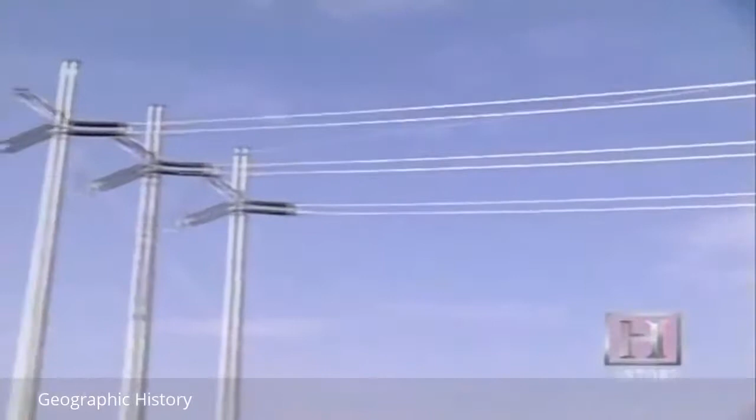Over the next century and a half, we took a world which had dominated us and transformed it into this, an electrified environment which responds to our every need. We control our climate, process information, and tend to our health with power that flows hundreds of miles across an interconnected transmission grid that encompasses the entire country.

Electric current, the flow of charged electrons, intimately influences how we live, yet most of us understand little about how it works.

In 600 BC, the Greeks first discovered that static electricity could be generated by rubbing amber. It wasn't until the 18th century, however, that Benjamin Franklin theorized that electrical fluid might be composed of particles. By harnessing this flow of electrons, or current, inventors and industrialists more than a century later laid the foundation for what would become the colossus of electrical generation, the modern power plant.

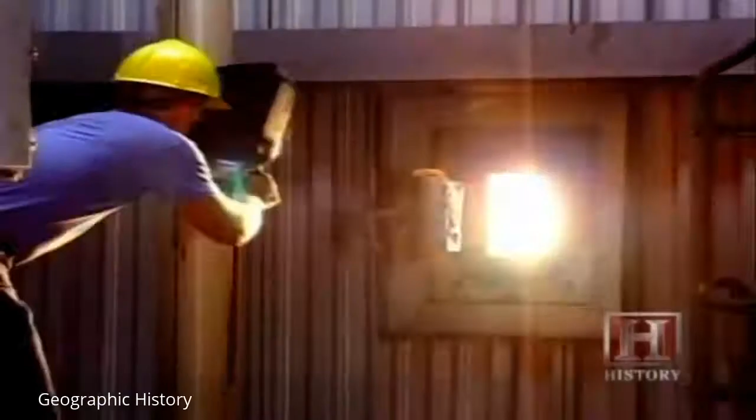It can be anything from a red-hot behemoth that once started consumes trainloads of coal without interruption for years, or it might be a nuclear plant, incongruously perched at the edge of the shimmering Pacific Ocean, a plant that on its own produces 20% of Southern California's energy.

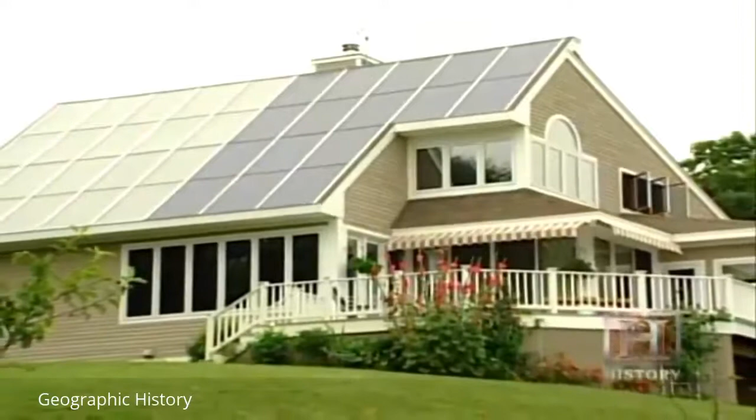Or maybe it is simply this, a house that generates more energy than it consumes and returns that surplus to the electrical grid for public use, a new model for the future of power plants.

But whatever guise contemporary power plants take, the basics of their design and their integration into commercial and domestic life were forged more than 100 years ago in a conflict between two giants of industry and invention, Thomas Edison and George Westinghouse. The outcome of the fierce competition between these two men would ultimately dictate how electricity would be generated and transmitted. But their first battle would be waged over how to bring safer light to the cities of America.

Early natural gas lighting systems in homes, for example, on occasion were quite dangerous. They had no shut-off valves, so if the lamp went out, the gas would continue to accumulate in the home, and they had some major explosions in homes.

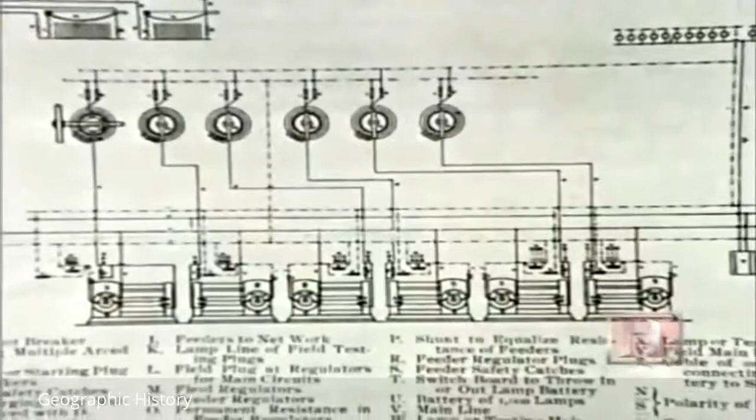In 1879, Thomas Edison invented the first commercially practical incandescent lamp with a high-resistance filament that glowed when heated by a low current. He soon followed this with designs for a complete distribution system for light and power.

On September 4, 1882, after delays and cost overruns, Edison opened the first electric utility, the Pearl Street Station in the heart of Lower Manhattan's financial district.

Edison knew that his product was going to be expensive and would need to reach many customers. The whole reason for Edison's Pearl Street Station in New York City in 1882 was to demonstrate that electric technology could be used on a widespread basis, not serving one customer like steam engines in old factories, but many, many customers. Edison's choice of direct current technology at Pearl Street limited his power plant's range.

The major disadvantage to direct current power and power plants at the time was you could not transmit electric power very far without losing a tremendous amount of the current, so you needed a power plant every half mile or mile throughout the city.

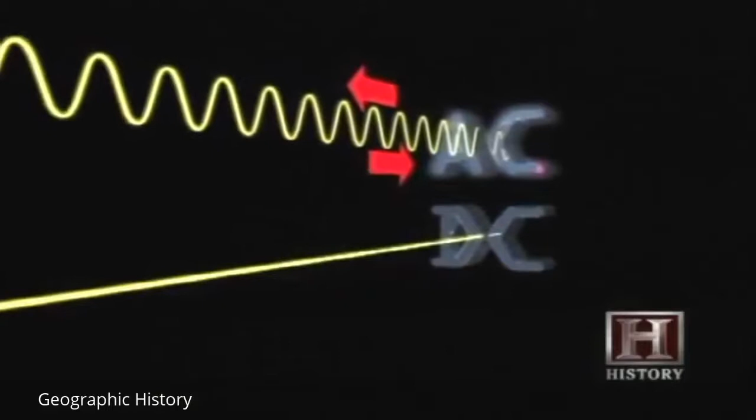Edison's main competitor, George Westinghouse, saw that electricity's future was in long-distance transmission. Westinghouse put his company, Westinghouse Electric, to work at perfecting a system using alternating current, which flows in reversing waves which propagate more easily and with less resistance in a transmission wire.

The beauty of alternating current is that you can generate that at a very high voltage and then step it down essentially to any voltage that you need. So you could step it down to a very low voltage that somebody would need at a house for their lighting, or you could step it down to a somewhat higher voltage that some business might need or some factory would need.

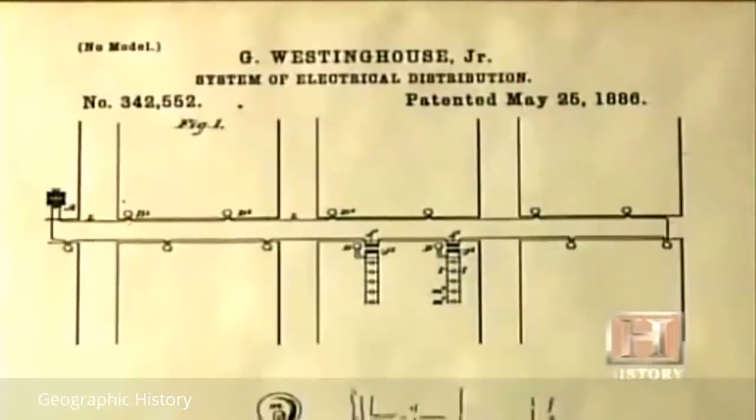George Westinghouse purchased several vital alternating current patents from Nikola Tesla, a Serbian-born inventor. Westinghouse recognized Tesla's genius and brought the inventor to Pittsburgh to work for him. Together, they designed the components necessary to alternating current's success.

In 1887, George Westinghouse invented a meter for alternating current. He thought if you were going to make alternating current commercially available, you were going to have some way of measuring what you're going to sell to your customers.

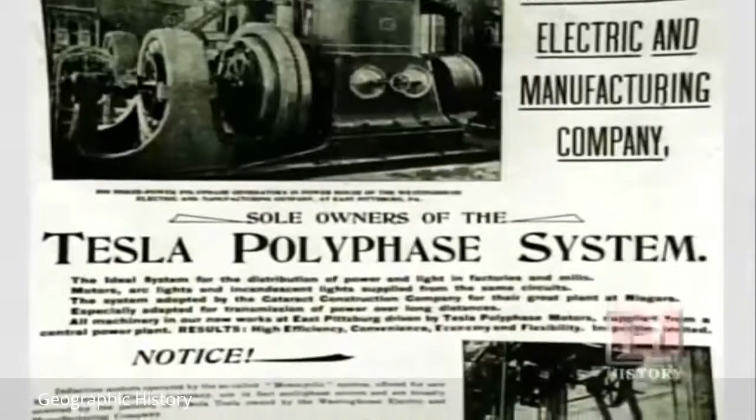Westinghouse's aggressive pursuit of alternating current technology put him in direct conflict with Edison. It was a battle of business and technological giants, Thomas Edison versus George Westinghouse. This is called the Battle of the Currents, and it was essential because the technology that won would dominate the industry for the remainder of the foreseeable future.

With so much at stake, it's not surprising that the Battle of the Currents took a bitter turn. Edison went so far as to lobby New York State officials to have his competitor's product, alternating current, used to execute condemned men at Sing Sing prison.

Perhaps the lowest blow is when they were looking for a word to describe this. Today we say a person is electrocuted, but at the time they didn't have a term, and Thomas Edison suggested that they use the word Westinghoused, that the condemned man was Westinghoused. Obviously it's very, very upsetting to George Westinghouse.

But Westinghouse focused on the industrial competition at hand and left the courting of public opinion to his adversary. There was a great World's Fair coming up in 1893 in Chicago, and they asked for proposals to illuminate the fair, to light it at night, realizing that nowhere in the world had a major event ever been illuminated at night before. Westinghouse bid $500,000, half of what Edison bid, and was awarded the contract.

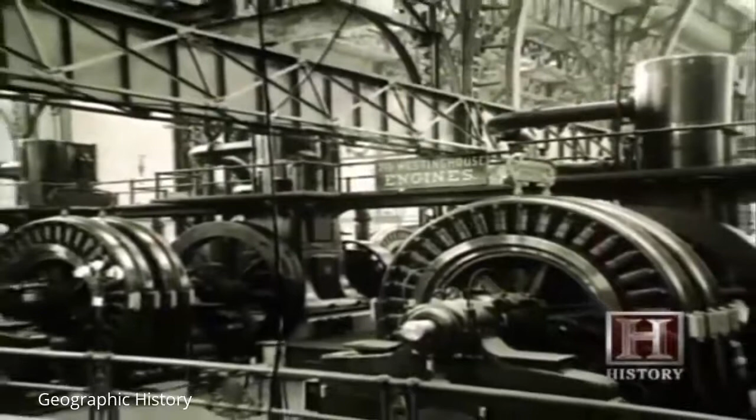He took advantage of the opportunity to promote his product, installing a complete alternating current power plant on display for everyone to see. It had a giant Westinghouse alternating current switchboard, and the impressive part was that there was only one operator. One operator could control all the electrical equipment for the World's Fair of 1893.

27 million Americans and foreign visitors attended the Chicago World's Fair of 1893. Tesla and Westinghouse made sure they left the fairgrounds with a good idea of who was winning the Battle of the Currents. Both realized this was an opportunity to really showcase the potential of alternating current. One display had this huge word, power, and at night electrical currents flashed all around it, just like little bolts of lightning illuminating the word.

After this dramatic success, Westinghouse was prepared for his greatest challenge, competing head-to-head with Edison for the right to build the largest power plant in the world.

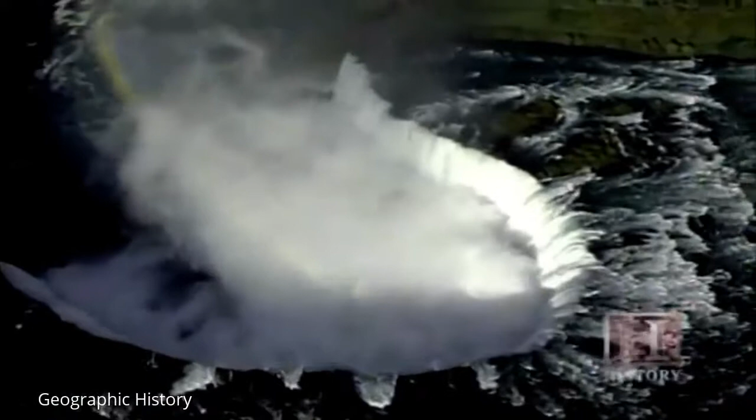Niagara Falls. For hundreds of years, men had understood that the power of falling water could be converted into mechanical energy, the energy to run mills. But by the 1880s, there was open debate over whether the falls should be harnessed with this old technology or transformed into electricity and transmitted to industry and individuals hungry for power.

Looking at Niagara Falls and the potential for generating power, it was obvious to a lot of intelligent men at that time that there was a tremendous amount of power in the water coming down over Niagara Falls. If it could be harnessed, it could do great things for industry.

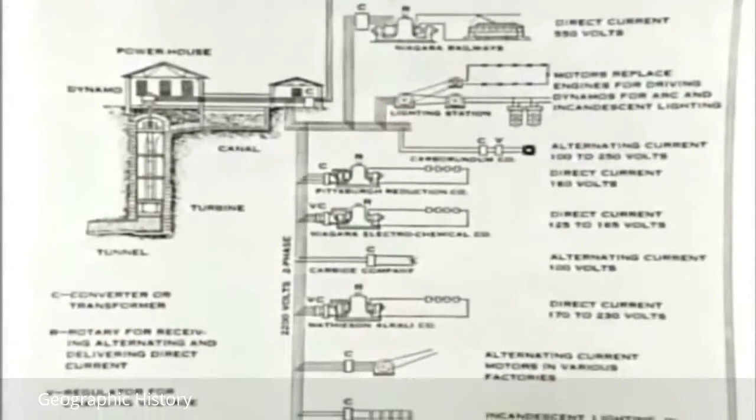The International Niagara Commission solicited plans from leading engineers to design a plant that could transmit electricity to nearby Buffalo's manufacturing interests. This was a dramatic opportunity for George Westinghouse's alternating current system. Ultimately, the decision to choose alternating current, which could be pushed much further distances over transmission lines from the powerhouse, won the day.

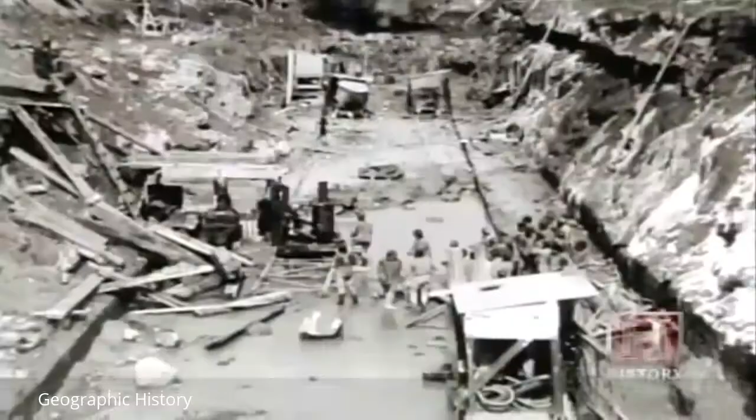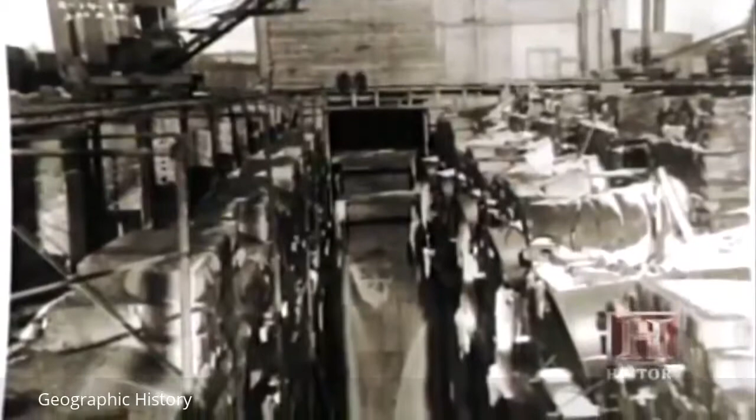It took from 1892 to 1895 to build the tunnel that would divert the force of the Niagara River to the plant's turbines. During the summer of 1894, electric cranes eased the 29-ton turbines, the largest built to date, into the wheel pits. The turbines were essentially windmill blades that could be driven by the force of Niagara's water.

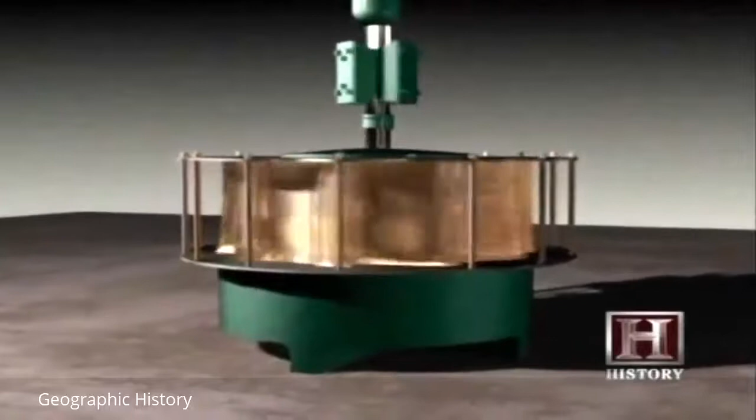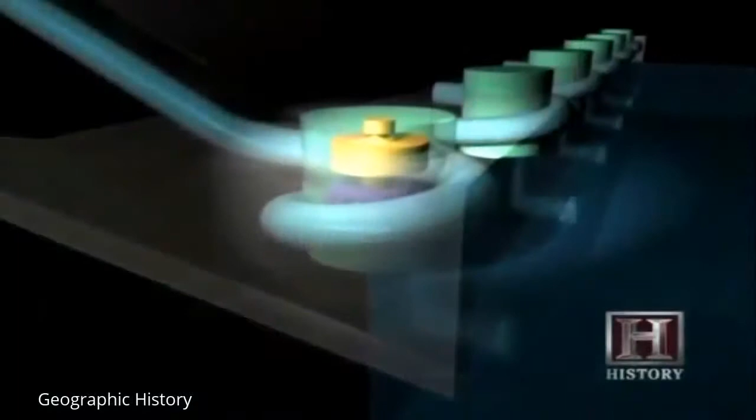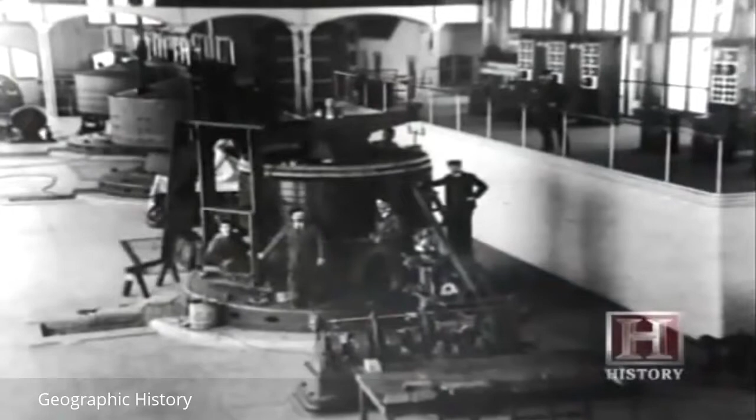When the plant was finished, water flowed through the forebays and into the penstocks, vertical pipes about 8 feet in diameter, before entering and driving the turbines, which in turn spun rotors beneath the generators. Inside the generator, a magnet spun, creating a magnetic field which induced an electric charge in a casing of copper coils, thus producing electricity. In 1896, the Niagara Power Station began transmitting power 17 miles to Buffalo, New York.

But it wasn't until 1901 at the Pan American Exposition on the Buffalo Fairgrounds that the general public was able to witness a large-scale display of the wonder of long-distance electrical transmission. In order to transmit electricity over this distance, transformers at the plant increased voltages to 11,000 volts, 4 times the voltage of an 1891 plant that Westinghouse had built.

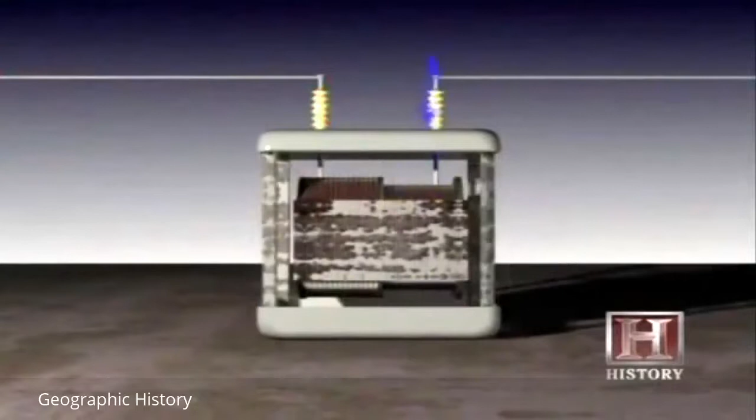Inside a transformer, an electric charge passes through one wire coil, inducing a higher or lower charge in another separate coil. Voltages multiply at the ratio of the number of turns in the primary coil to the number of turns in the secondary coil. What the Westinghouse engineers understood very clearly was that large power plants, which could produce large amounts of electricity and serve larger numbers of people over a wider area, needed transformers to increase the pressure of electricity, to push it longer distances.

The Niagara Power Plant provided not only a technical blueprint, but also an economic model that would be duplicated time and again over the coming century. If you build it, they will come. Heavy industry would congregate around a reliable, cheap energy source. There was a fellow in Pittsburgh named Hall who had an early process for producing aluminum using electricity. He moved his company from Pittsburgh to Niagara Falls when the power became available. That company went on to change its name to Aluminum Company of America, and as we know today, it's the largest aluminum company in the world.

It soon became clear as electricity flowed out of the Niagara Power Plant that alternating current was here to stay. After Niagara, even Edison abandoned DC for AC technology. I think it would be very fair to call George Westinghouse the father of the modern power plant. He was the catalyst, the person who had the commitment for this 10-year period of time to pool the resources to make alternating current successful.

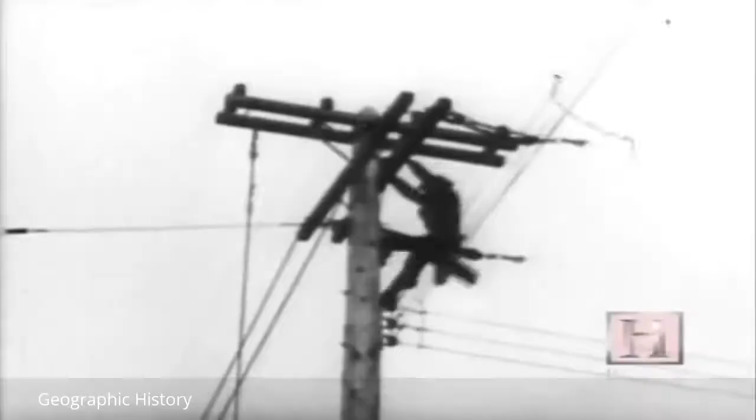A number of people compare Hoover Dam with the earlier Niagara Falls installation. The difference between the Niagara Falls of the early 1890s and Hoover Dam in the mid-1930s is the improvements in technology over that period of time: larger, much more efficient generators, and most importantly, very high voltage or high pressure transmission systems. Whereas people 17 miles away from Niagara Falls could receive electricity in the early 1890s, by 1936 and 37, when power was coming out of Hoover Dam, it was going over 250 miles to Southern California.

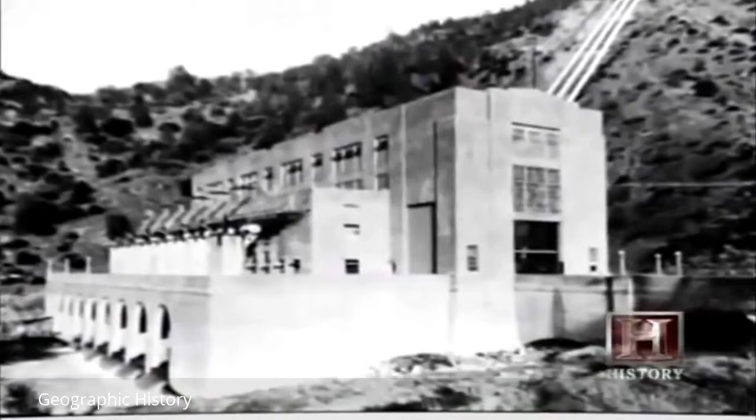In the decades between Niagara and Hoover, privately owned power companies flourished throughout the country. It did not take long for company owners to realize that consolidation was the only way to profit in an industry that required so much investment to build infrastructure.

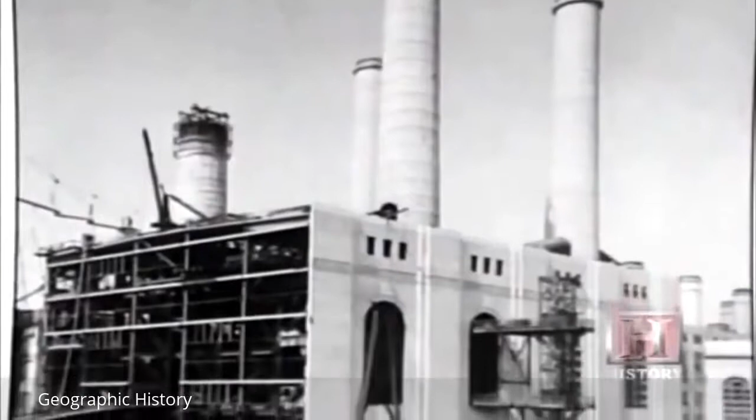Tom McCarter had been the Attorney General of New Jersey. His idea, which was very novel at the time, was to basically draw a line between New York City and Philadelphia and buy up all the municipal light and gas companies and traction companies that existed between those two major points. By doing so, he was able to generate the critical mass necessary to go out and begin to fund the tremendous infrastructure that was going to be required to build the electric system.

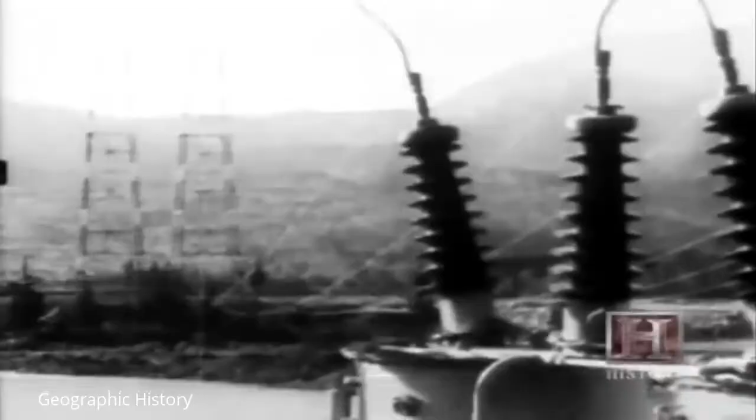It was also a major step in the growth of the transmission grid. More customers meant greater revenue. An expanding utility could afford the expense of running transmission lines, linking multiple plants into a regional grid. This system spawned the giant interstate power transmission grids that today cover thousands of square miles. Improved transformer technology and higher voltages meant electricity could be sent farther and farther. By 1903, you had over 100,000 volt technology, which meant you could push that electricity 150 miles or more. By the early 1920s, you had 220 and 230,000 volt technology, which meant literally anything within a range of about 300 miles of the power plant could receive electricity.

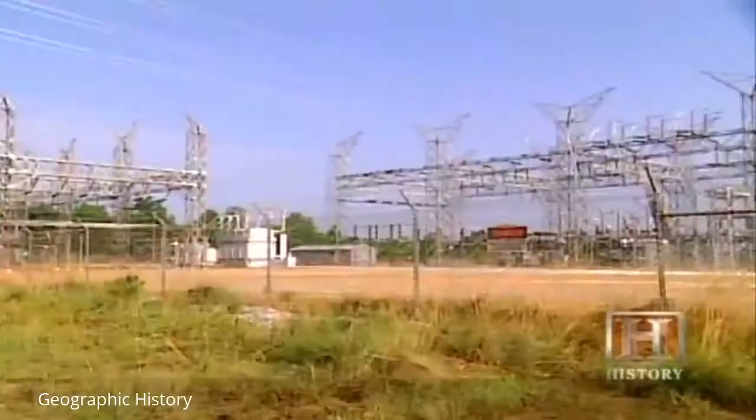The workhorse of this grid is the transmission substation, like this one outside Athens, Georgia, where the job of increasing and decreasing voltages is done. Our network grid system is based on about 3 main voltages, and then we go to some lower voltages for shorter routes. The network system is basically 500,000 volts, 230,000 volts, and 115,000 volts. The 500,000 volts is basically like an interstate system. It travels from state to state, and there's about 5-6 main arteries across the state. The 230 kV system is sort of like the U.S. highway system. There's more routes, but still not the largest number.

There's the largest number, the 115,000, which is more like the state highway system. It carries power from town to town, all over the smaller towns, medium-sized towns, and to other areas to feed different loads.

Transformers at the substation alter the voltages so that electricity can be routed where it needs to go. We're standing in front of the 230 to 115 kV transformer, the big box here. The transformer converts the 230 kV voltage down to 115,000 volts and then supplies power to the 115 bus, which is then shipped out across the 115 kV grid.

Electricity flows along the 115 kilovolt power line and gets stepped down as it nears its destination, private homes. This is a typical distribution transformer serving a home. Distribution lines are either 12,000 or 25,000 volts. It's stepped down to 120 to 240 volts to feed the house for the normal television, lights, appliances, everyday use.

This kind of everyday use has fueled the demand for power throughout the century, as consumption and desire for comfort have grown. To meet society's runaway electrical needs, utilities built their bread and butter plants.

Next, what eats 36,000 tons of coal a day and never needs a rest? On 2,000 acres in Bartow County, Georgia, sits the second largest coal-fired plant in the United States, Plant Bowen. Owned and operated by Georgia Power, the facility produces in 15 seconds all the electricity a home will use in a year. With the exception of hydroelectric power in water-rich states, most of the country's electricity has been generated at coal-fired plants.

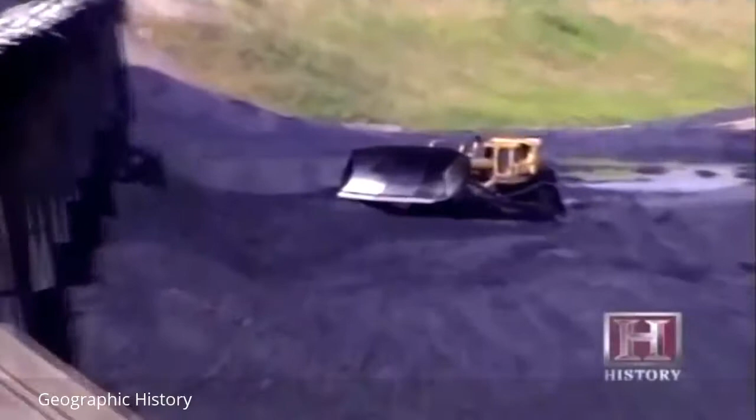In its heyday, coal was as plentiful as environmental concerns were scarce. Investment flooded into utilities, and coal plants grew bigger and more efficient. Power plants went from small cottage industry to big, massive power plants. They were taking this steam cycle and really wringing every ounce of energy from it that they could, and doing so in a very efficient way.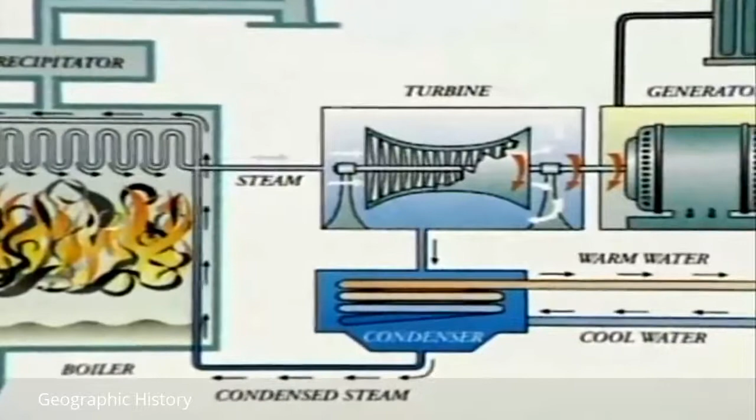Basically, the way you generate electricity, you take water, and the simplest cycle is you boil it, and you create steam, and you pressurize it with this amount of heat that you're introducing into it, and you put it through a turbine. The turbine is a simple fan, and as you introduce the high-pressure steam, it turns a generator.

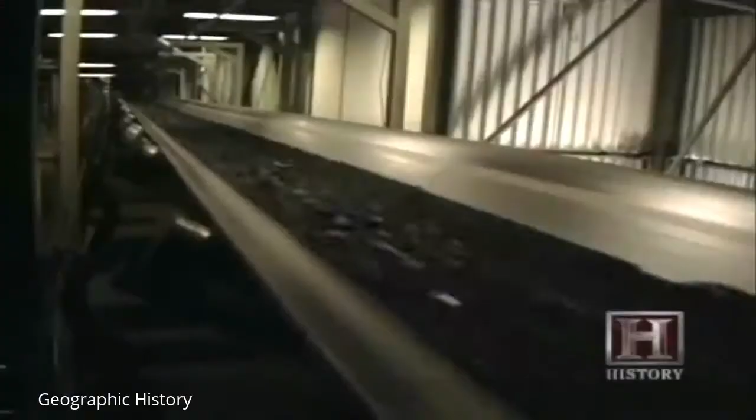But this simple steam cycle was wasteful. It would take about 10 pounds of coal to produce the amount of energy that it would take to light a 100-watt light bulb for an hour. That's a very significant amount of coal. Today, through technological changes, we've been able to bring that down where now we're far under 1 pound of coal to produce the same amount of energy.

It took a combination of disciplines to affect this kind of fuel efficiency. You had the power plant engineers refining that process, increasing the thermal efficiency, finding out how to use fuels in a more efficient way. You had metallurgists working on piping that were trying to bring temperatures up higher. You had boiler feed pump folks working on producing tremendous amounts of pressure. All this to supply energy to a growing population and industrial base that demanded more power.

Engineers call this demand load, and this load changes depending on the season and time of day. Load is the electrical demand on our system. If you turn a light bulb on, that is putting a load on our system. It's putting a demand for the use of electricity.

The use of power goes up dramatically during the day, particularly today with air conditioning, so that you have very low levels of load at 8 o'clock in the morning. It goes up higher and higher in the morning period, and then about 3 o'clock in the afternoon, everybody's air conditioning is working at its maximum, industry is working hard, and that's the maximum peak load.

To service this energy cycle, a utility needs 3 types of plants. You have base load, which is 24-hour load, and that's a plant that can run full-time. You have intermediate load, which is a plant that will cycle. It'll come on in the morning, and then at night it'll shut down. And then you have peaking facilities, which run really for just a few hours a day. You need 3 different kinds of machines to cover those loads.

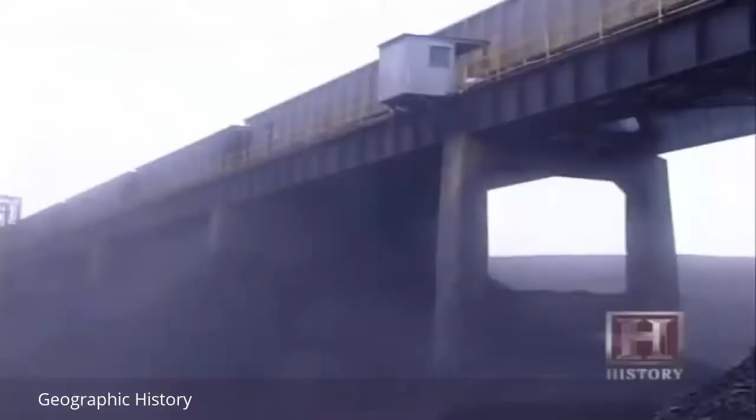Plant Bowen is what we call a base load power plant. The economics of operating it are such that it pretty well runs day in and day out, 24 hours a day. It takes 4 9,000-ton train loads of low-sulfur coal arriving from eastern Kentucky each day to supply the plant. The coal is pulverized to the consistency of talcum powder before being blown into the boilers to be burned to heat water.

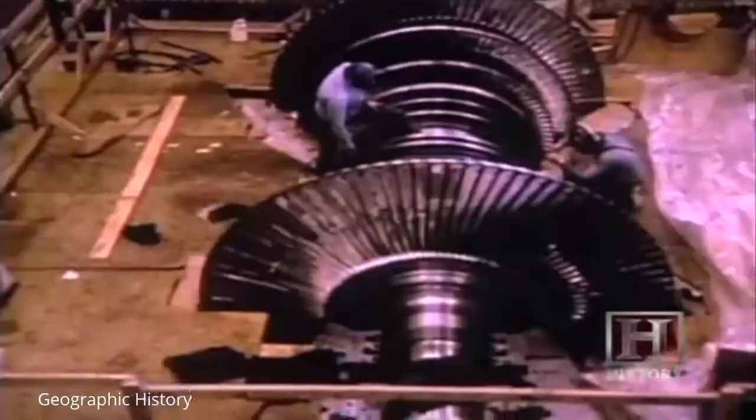It's turned into steam that has a temperature of 1,000 degrees and a pressure of 3,500 pounds per square inch. This steam is delivered to a turbine, which turns a generator. The generator and turbine spin at 3,600 RPMs, generating electricity that we put out on our transmission line.

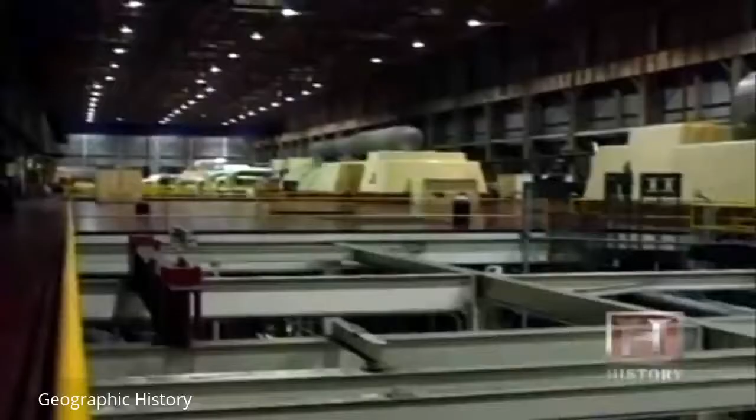Once the steam has done its work in the turbine, it enters the condenser, where it flows over 36,000 copper tubes containing water from the nearby Etowah River. The river water absorbs heat, condensing the steam back into water so it can be reused in the boiler. Hot river water is then cooled in 400-foot high cooling towers, each tower cooling 300,000 gallons a minute.

Not surprisingly, it is no longer possible to find communities who will welcome a plant of Bowen's scale with its looming 1,000-foot high stacks.

As a result, utilities like Georgia Power have developed peaking facilities with much smaller footprints, both in terms of land use and environmental impact. Combustion turbine plants like Plant Dahlberg in northeast Georgia burn natural gas or fuel oil instead of coal in what is essentially a souped-up jet engine.

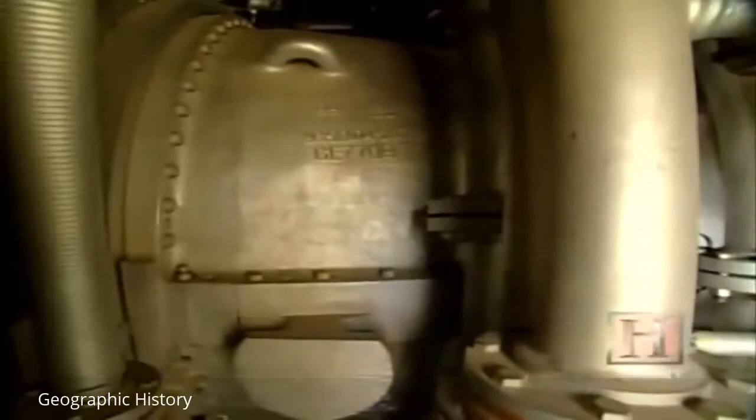The gas turbine engine uses hot air, not steam, to produce electricity. Fuel mixes with air, is burned, and the expanding gases drive the turbine. Once the turbine spins, the process is much the same as in a steam cycle plant.

The technology for this type of unit with the combustion turbine is very similar to what you would see on a jet engine. The jet engine has a compressor that brings air in, compresses it, burns it, and produces the power they use as thrust. This is a much larger machine doing the same thing. It has been equated to a jet engine on steroids.

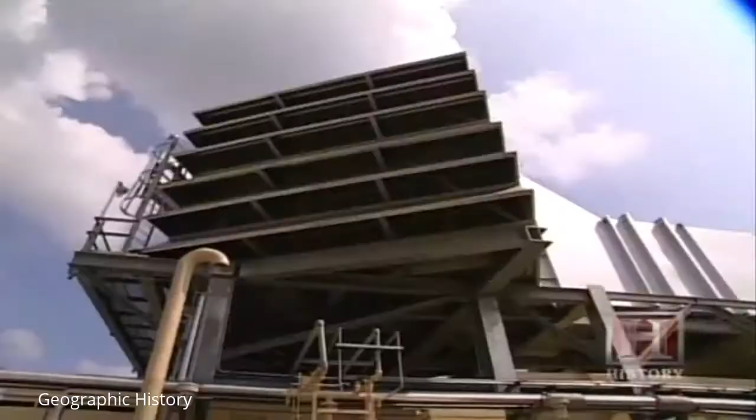Plant Dahlberg's 8 units combined produce about 600 megawatts of energy, less than the output of a single unit at Plant Bowen. As a result, the turbines are only used to produce supplemental electricity when it is needed.

It's used to provide energy to get you through the high demand period of the day. Today, the energy market and societal pressures for safer, cleaner power have created a demand for smaller plants that are more evenly distributed on the landscape. This is changing the shape of an industry whose motto had always been, bigger is better.

Built during the years that followed the Depression, those bigger plants produced more power, but in the 1930s and 40s, rural farms had no way of tapping into that power. Remote, expensive to reach with transmission lines, they simply were not on the grid.

Investor-owned utilities primarily did not want to go to the cost of providing electricity to rural customers, because you would face the cost of building power lines, in some cases 100 miles long, that would only serve maybe 4 or 5 customers. No return on your investment.

President Roosevelt and Congress established the Tennessee Valley Authority in 1933, and the Rural Electrification Administration in 1935. The agencies shared the goal of bringing electricity to rural America, where only 10% of farms had power.

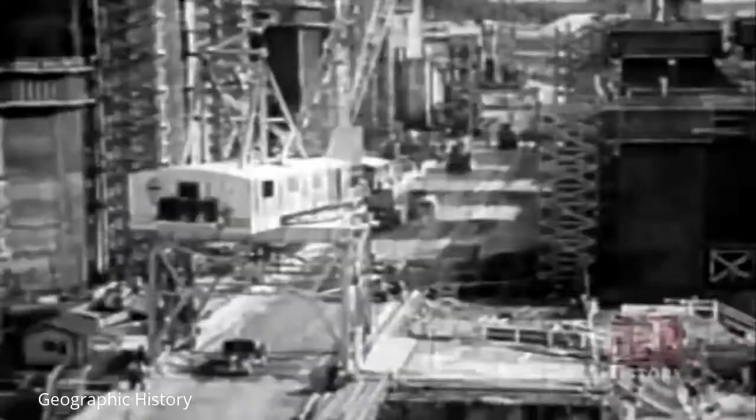The TVA ostensibly began as a flood control effort by the Army Corps of Engineers, but it was quickly used as a way to find new sources of hydroelectric generation on the rivers of the area. Dams were built, ultimately totaling 42 in the system, and a massive hydroelectric power project was launched, which grew to a total capacity of 4 million kilowatts by the 1970s.

By this time, the mission of the REA and the TVA had been accomplished. 98% of all farms in the United States had electric service.

Once the TVA had exhausted the hydroelectric possibilities of the river basin, administrators turned their attention to other forms of power. In later years, the TVA moved away from its hydroelectric base and actually was a pioneer in the scale-up of some of the coal-fired boiler technology that we see today, and became a diehard proponent of nuclear power in the 50s and 1960s.

Next, the half-life of nuclear power. How a technology grew up and got old before its time.

In 1942, Enrico Fermi created the first self-sustaining nuclear chain reaction in a lab hidden beneath the football field at the University of Chicago. And in doing so, launched the atomic age.

In an atom bomb, a sufficient quantity of weapons-grade plutonium is imploded by a TNT charge, initiating a chain reaction, or fission explosion.

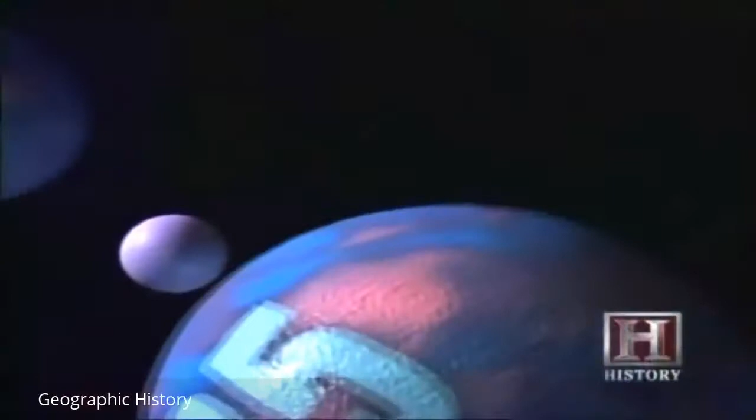Fission is the process in which natural elements that are radioactive in nature, like uranium, are bombarded with neutrons, and then split into other elements. When they split into other elements, they release energy.

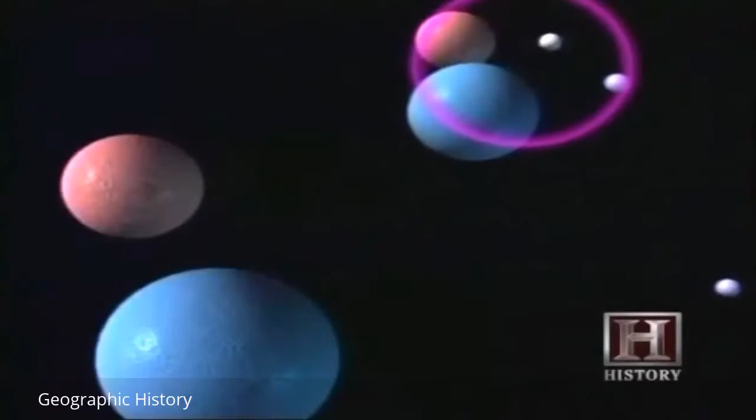Fortunately, not all nuclear reactions end in devastation. It was the peacetime harnessing of atomic energy that spawned the nuclear power industry. The first privately financed and commercial nuclear power plant built without government help was the Dresden 1 facility outside of Chicago in 1959.

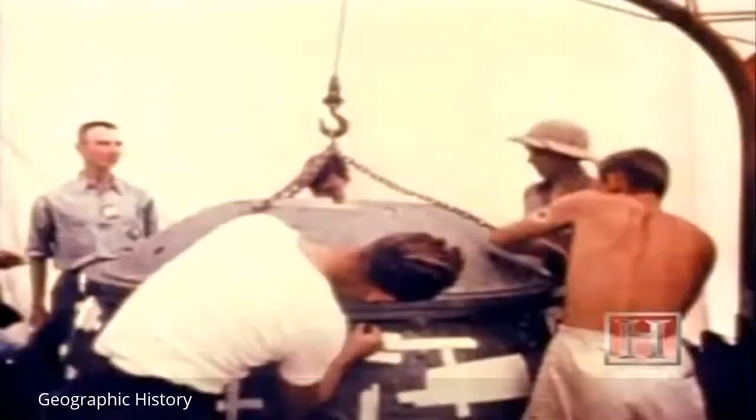If you think of the Manhattan Project and the atomic bomb and the ending of World War II, the advancement in that technology over a 10 to 15 year period was pretty dramatic. Today, more than 100 nuclear power plants are operating in the United States, supplying 20% of the country's energy needs.

San Onofre is what we call a baseload power plant, which means it tries to operate 24 hours a day, 365 days a year at full power output, which in the case of each of these reactors is a little over 1,100 megawatts of power. The San Onofre Nuclear Generating Station in California's San Diego County supplies energy for 2.5 million homes and businesses.

Fuel is uranium. Uranium has the natural ability to fission, which means the nucleus of the atom of uranium can literally tear itself apart. When it does that, it releases a tiny amount of heat, but it also releases additional neutrons.

Inside a pellet of uranium, there would be billions and billions of atoms. So in very short order, we can get a chain reaction going in the uranium. When you have a billion atoms releasing a little bit of heat, it becomes a large amount of heat.

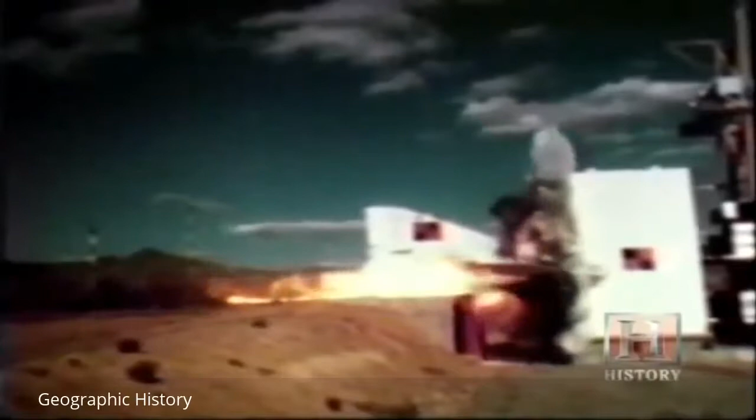This heat is released inside the nuclear reactor, which is housed inside a containment dome. The walls are 4.5 feet thick concrete and steel, and in theory would be able to survive any man-made or natural disaster, including earthquakes. In this stress test, the wall withstood a direct impact of an F-4 Phantom jet.

The reactor and its circulating system are filled with water, which submerges the fuel core. If you were to put a thermometer on the core, the fuel assembly itself, it would be in excess of 600 degrees. As the water circulates by that hot uranium, the water gets hot, comes out the other side.

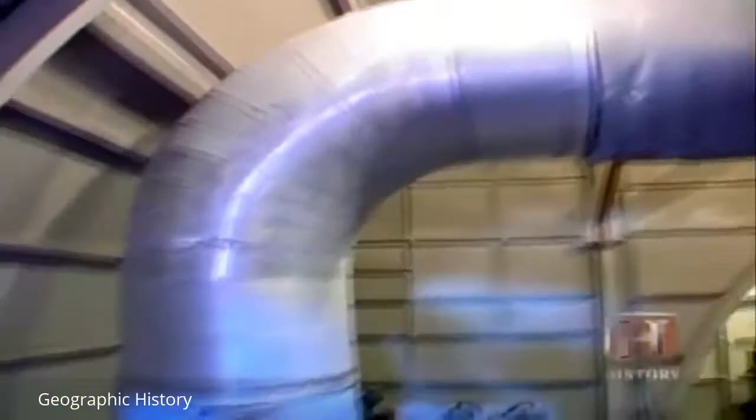It goes into two very large devices called steam generators. The steam drives the mechanical turbine, causing it to rotate at 1,800 revolutions per minute. That in turn turns an electric generator, and electrons are forced through wires, making electricity to power homes and businesses.

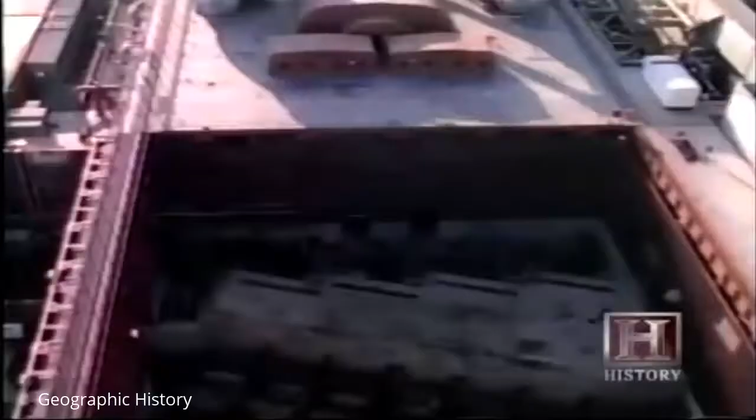The row of turbines and the generator together weigh in at 800 tons, or the equivalent of 800 Volkswagen Beetles. But despite this massive scale, it's still a fundamental process.

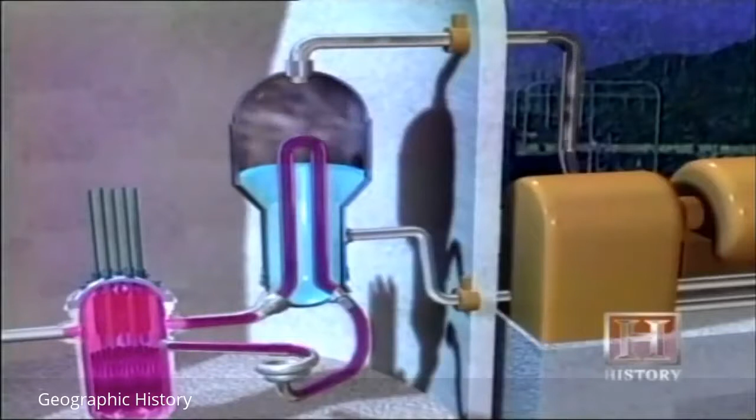As radioactive water from the reactor flows through the steam generators in a closed system, it heats clean water in a second closed system before it returns to the reactor. The clean steam drives the turbine and is then cooled by ocean water before returning to the steam generator, where it will again be turned into steam.

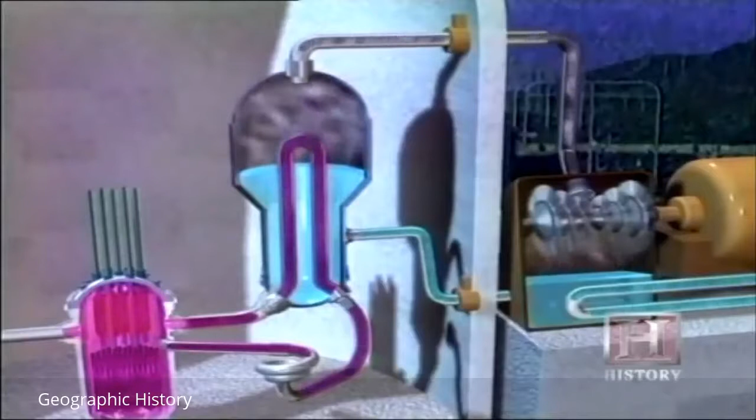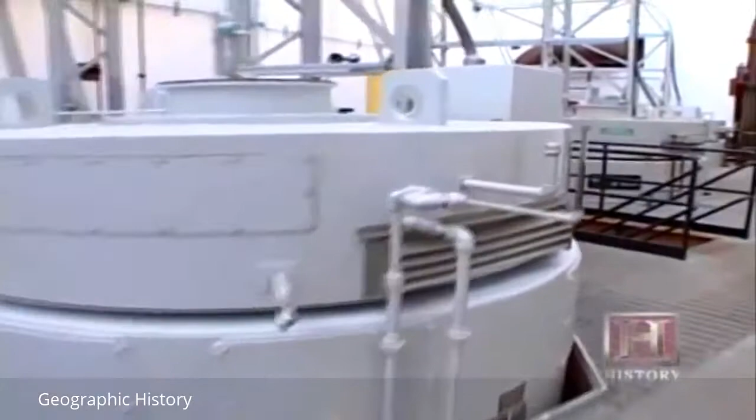Behind me over here, obviously, is the Pacific Ocean. And about 3,200 feet offshore, we have a 16-foot diameter pipe that's in the ocean. When we turn on the pumps, we draw in about 1.6 million gallons of water per minute.

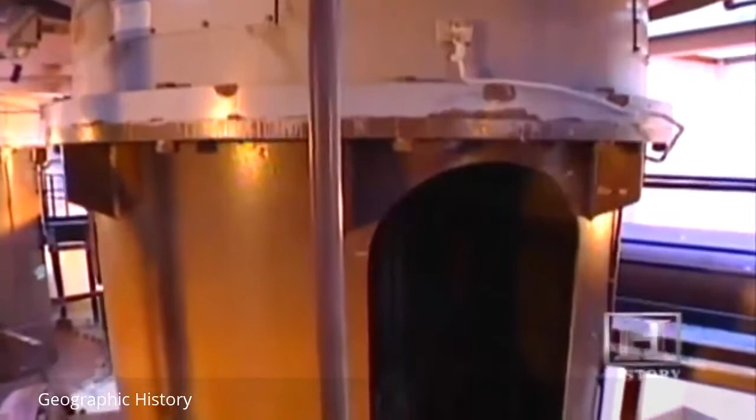The pumps are run by 4,000 horsepower motors. That's the equivalent of 6 NASCAR cars running at full speed. Each pump is capable of draining an Olympic swimming pool in 15 seconds.

If for any reason engineers needed to stop the nuclear reaction, they could do so by lowering an array of control rods into the core. The control rods absorb the atom-splitting neutrons that are driving the chain reaction, bringing it to a halt.

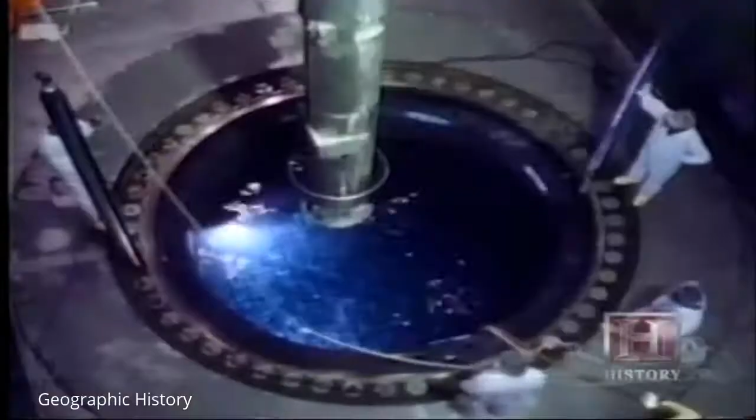But the surprising aspect of this plant is that, to a great degree, it runs without stopping. It can run for 2 years without needing new fuel at full output. San Onofre Unit Number 2 has been operating for about 530 days consecutively.

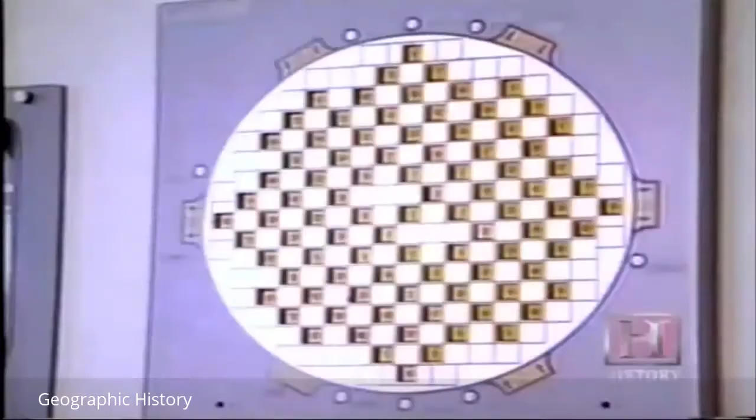If this was a natural gas plant or an oil plant or a coal plant, we'd constantly be needing to bring in trains or pipelines bringing in this fuel product. Outside, transformers step 22,000 volts of electricity up to 220,000 volts, essentially pressurizing it for transmission throughout Southern California.

Although nuclear power is a relatively new and seemingly successful technology, it has yet to recover from an accident in Harrisburg, Pennsylvania. The most significant event from a safety standpoint that has ever happened in the U.S. nuclear power industry was the Three Mile Island accident in 1979.

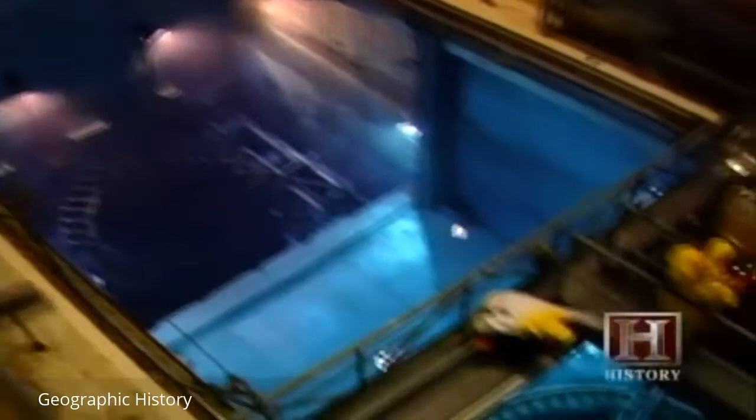This was literally a brand new reactor with brand new operators. At 4 o'clock in the morning, because of a combination of human error and mechanical design, they allowed the reactor's core, the uranium, to be uncovered for several hours. Without any water to keep the uranium cool, the uranium overheated and actually melted.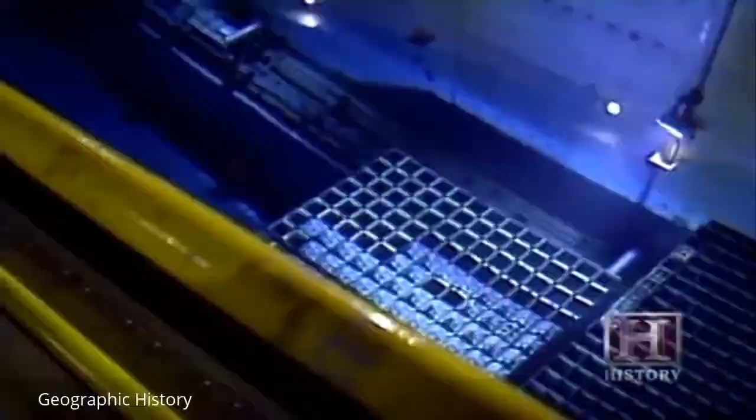Evidence suggests that fallout from the accident was low, but the public relations setback was immense. No new plants have been built since.

However, most nuclear power advocates predict that the industry will stage a comeback. In my opinion, there will be a rebirth of nuclear power. It's not a question of if, it's a question of when.

Proponents suggest the question of what kind of waste we want in our environment may well be nuclear power's most convincing argument. Nuclear power in the United States supplies about 20% of the electricity in the whole United States. That would probably surprise most people that it's that high. In that 20%, that avoids, on a yearly basis, the emission of about 177 million metric tons of greenhouse gases that would be emitted into the atmosphere if that 20% nuclear power was replaced, say, with coal or oil.

I would say that in the next 10 to 20 years, you will see the percentage of nuclear power rising, because that's a good way to address the global warming issue, and you do not have any solid waste other than the radioactive waste that you have to deal with. But I feel like we'll figure out a way to manage that problem.

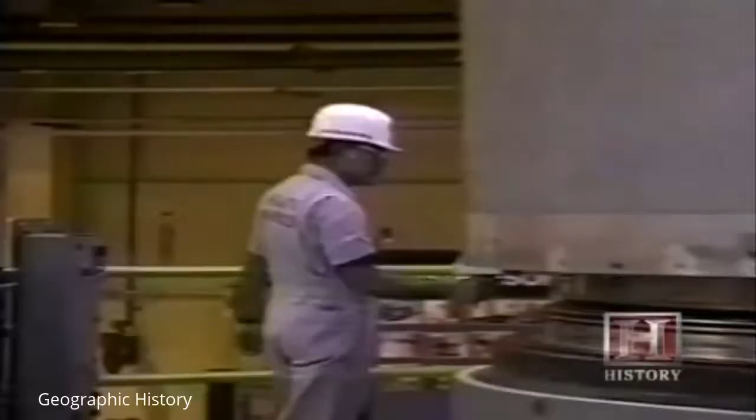Perhaps. But the 3,000 tons of spent fuel that the industry produces each year has no permanent home and is simply being held at the nuclear plants that produced it. Since this waste will remain radioactive for thousands of years, it's not surprising that most elected officials continue to say, 'Not in my backyard.'

Next, electrical consumption grows as interest in conservation wanes. How will power plants of the future meet the demand? Although the history of power plants is largely one of growth and technological triumph, the future of electrical generation could not be more uncertain. What is clear is that we have come to a crossroads where environmental concerns, unchecked consumption, and technological limits meet. The size of a power plant really has capped out at about 1,000 megawatts.

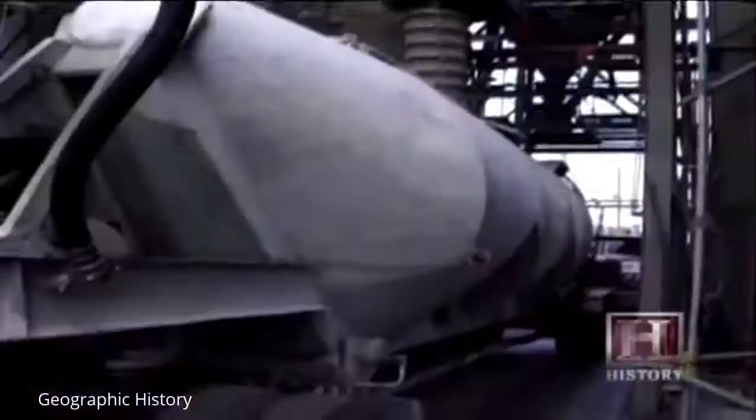And I was thinking about why that's really the limit. The boiler in a coal facility right now is the size of an apartment building. It's 11 stories high. Right now you've got turbine blades that in some cases are 14 feet long. And the tip speed of something 14 feet long rotating at 3,600 RPM starts to get supersonic.

Today, the country's electrical needs are supplied by regional interconnected power grids that in theory ensure that power flows where and when it is needed. In practice, these grids are straining to meet demand.

It's really a series of regional grids at this point. I mean, theoretically, you can move power from Texas to California. However, there might only be one really good path to do that. But ideally, you would want to have more options than that.

The lack of options in routing electricity is further complicated by heavy demand in summertime that is beginning to cause power shortages. It's an issue of generation. It's an issue of not having enough kilowatt hours in the system. And it's occasioned by catastrophic failures at a facility or even small problems that take it offline for several hours.

The flip side of insufficient power generation is a countrywide lack of interest in energy conservation. I see probably less emphasis and care about energy efficiency today than I ever have. I can't even get people that I know to turn off their lights when they don't use them. Right here in my office, I can't switch off the lights in my own office, or in individual rooms.

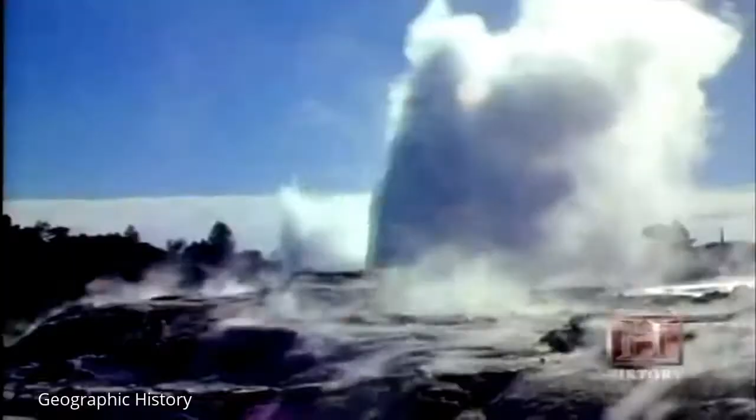But which one? The Earth's core is much hotter than the Earth's surface, fortunately, and the interaction of these temperature gradients comes very close to the surface in many parts of the world, and that can be used to create a hot fluid or create steam, which then drives conventional turbines.

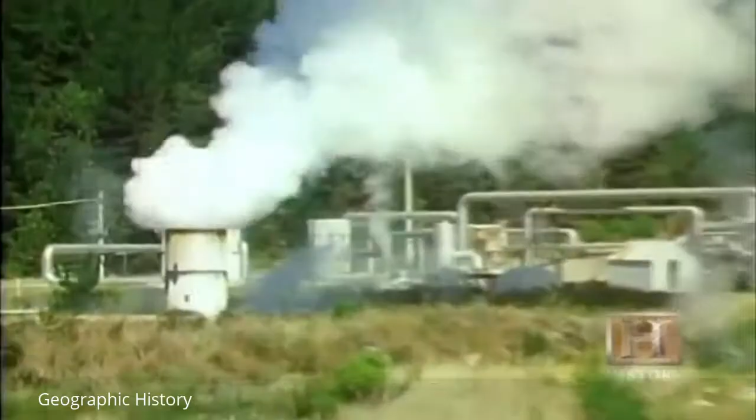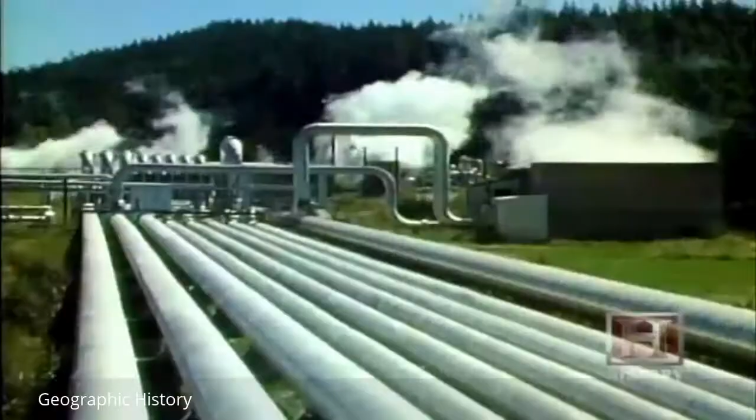At a geothermal plant, wells are drilled hundreds of feet below the Earth's surface into reservoirs with temperatures of 180 degrees Celsius or more. Although Mother Nature supplies the heat, geothermal sources like geysers are neither widespread nor are they clean. Fraught with problems in terms of, first, it's tough to locate.

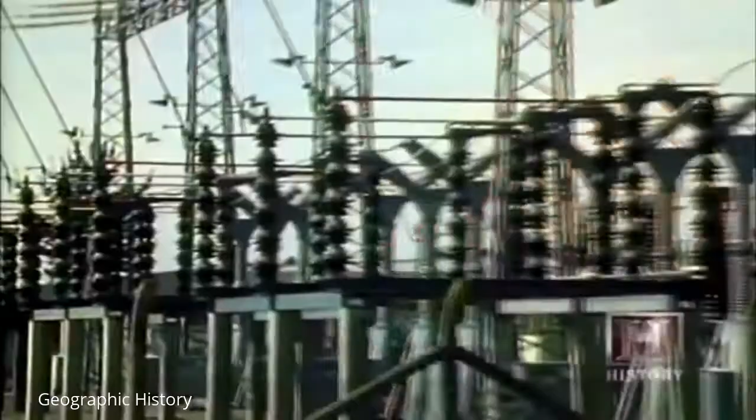There is none in the Northeast that I'm aware of, so we have difficulty using it here. With a geothermal facility, your primary pollutant is hydrogen sulfide. So the problem there is taking the hydrogen sulfide out, capturing it, and then finding some way to deal with that once you've captured it.

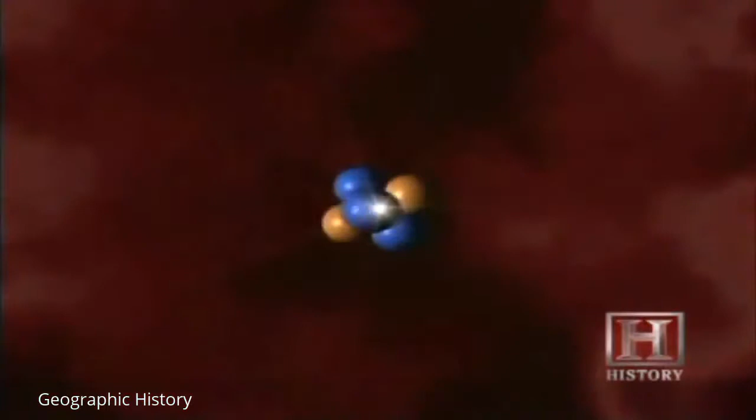The most futuristic of technologies, fusion, combines two light atomic nuclei to form a single heavier nucleus. This generates heat levels similar to the plasma state of the sun. That's a dream for egomaniac scientists who figure that they can take the absolute most cataclysmic forces known to man and manage them.

There is, however, a less dramatic way to capture the energy of the sun: solar power. But the debate surrounding it is about efficiency, not safety. Even in areas of the country where the sun shines a lot, like in the desert Southwest, the technology is still very behind in being able to supply the big base load plants that coal or nuclear plants can.

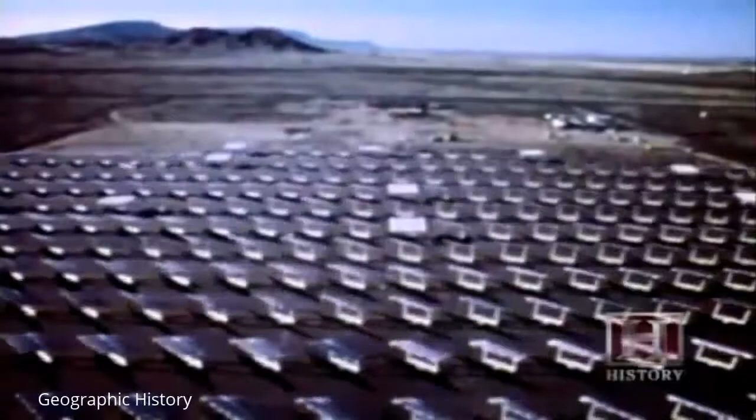For an example, to replace an average nuclear plant would take about 600 square miles of solar cells with today's technology. Solar advocates say that it is not so much the technology, but the concept of massive centralized power plants that limit solar's effectiveness. Perhaps the power plant of the future looks something like this.

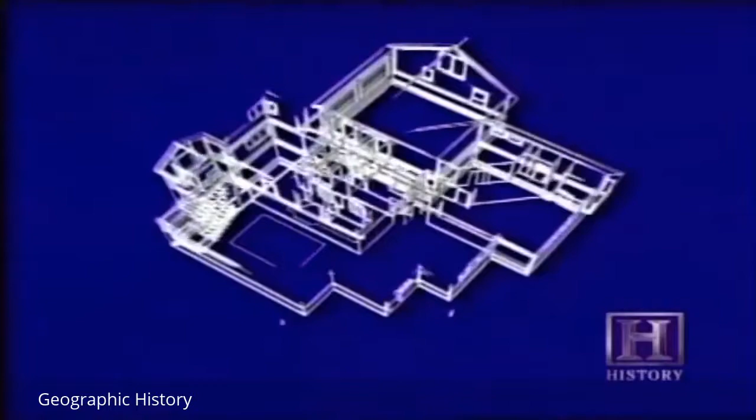A house on the Maine coast that generates more energy than it consumes. This house incorporates both solar thermal for space heating and hot water, and solar electricity for electrical production. The panels are integrated to form the finished weathering skin of the south roof, and the house pretty much exists in terms of its heating, hot water, and electrical energy requirements from the harvested energy that falls on the roof.

The house does more than just exist. It contributes to the energy needs of its community. And homeowner William Lord is quite proud of this fact.

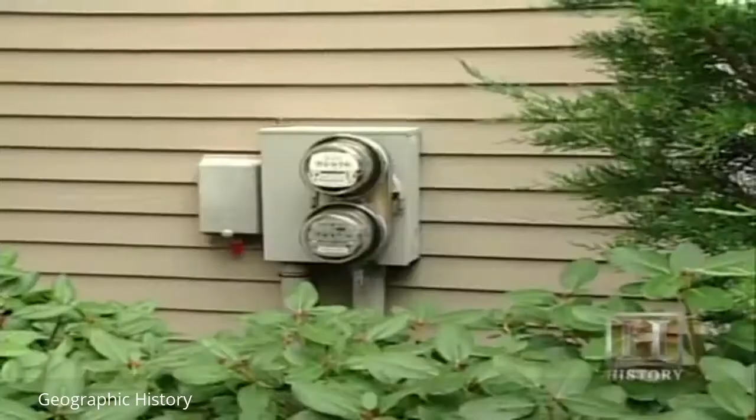We make most of our own hot water and all of our electricity. In fact, we generate more electricity than we actually use. So the process of fitting into the environment is seamless in our case and is not disruptive. Solar power not only makes environmental sense, but economic sense as well.

We have two meters on the house. One measures the excess energy that we export to the power company, and the other meter measures what energy we take from the power company. And in Maine, we have something called annualized net metering, and the bottom line is that we essentially pay no electric bill annually. When we built our solar house, we didn't realize we were actually creating an event.

We added to that event a place where people come to learn about solar power. We have many visitors here. We added to that event our website. The Maine Solar House gets more than 1 million hits a year.

This month I'm taking a look at a house in Kennebunkport nearby. The former President of the United States, George Bush, has solar thermal panels on his roof. I think that's a great hope for everybody because clearly that is probably the best way to produce power. Taking incident solar energy doesn't pollute anything.

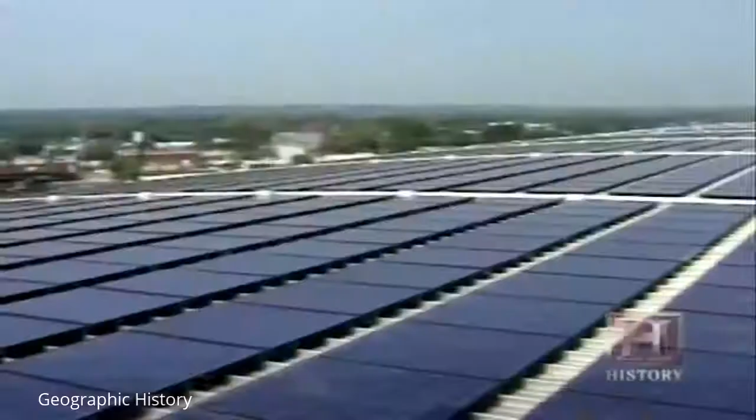The direct conversion of solar energy into electricity with photovoltaics is the most environmentally benign method of making electricity. And that, coupled with other conversion measures such as wind energy conversion and hydropower, can combine to gradually displace conventional systems and build a resilient energy economy based on renewables. It's not a question of if, but when.

And from my perspective, time is short. We should be investing the relatively plentiful and relatively inexpensive reserves of conventional energy to build this technology bridge to the future, because these are finite resources and they are not going to be here indefinitely.